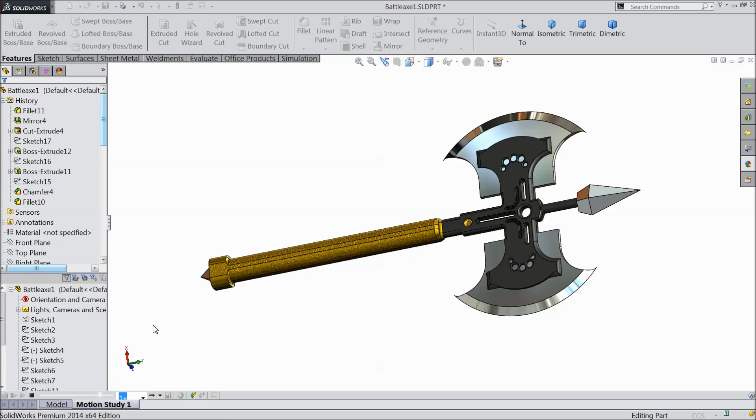Now let's start to make the Battleaxe. I prefer to choose front plane sketch. First select center line. Draw a horizontal and vertical center line. Exit.

Choose corner rectangle. Exit. This is the rectangle. Just select these three lines and make relation symmetric.

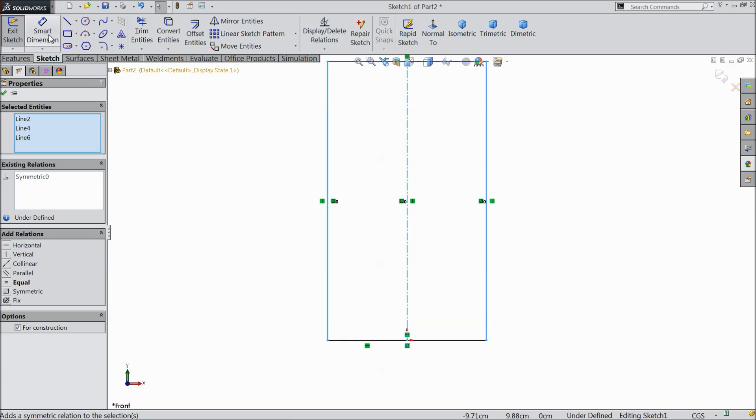Now select smart dimension. Select 5 centimeter. Make sure our units are in centimeter.

Select circle and draw a circle here. Let's keep the diameter 2.5 cm and the distance from origin point must be 15 cm.

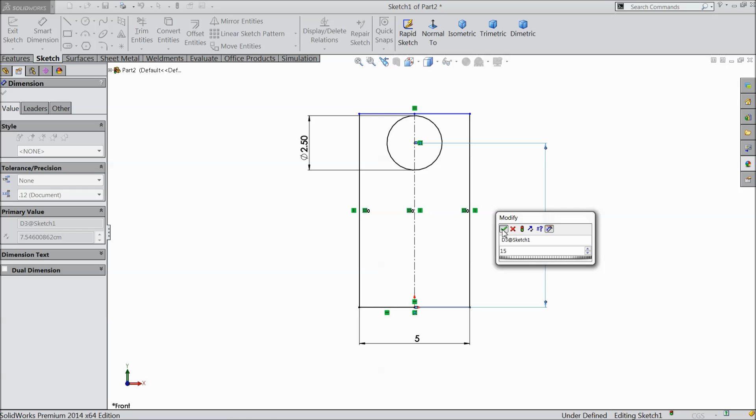Now expand this circle. Choose here center point arc. Start from this center point up to here. Exit. Now let's define this radius.

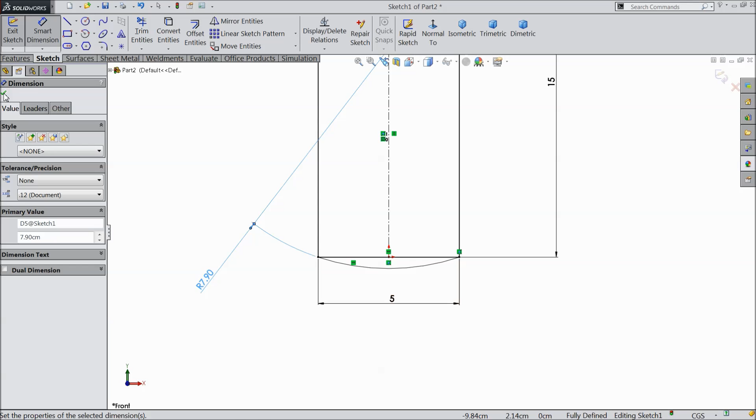Again choose center point arc. Select this point and start a circle from here to this point. Exit. Let's make the radius keep 7.9 cm. Now select this inside line and make construction line.

The same here, select this line, construction line. Choose corner rectangle. Draw a rectangle.

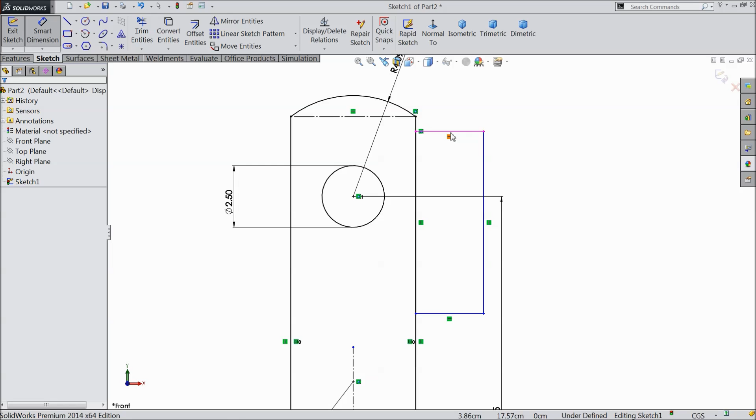Let's say width 3 cm and the distance from here to this line must be 1 cm. And let's define the length 7.5 cm.

Now select these three lines. Mirror. Mirror about this vertical midline.

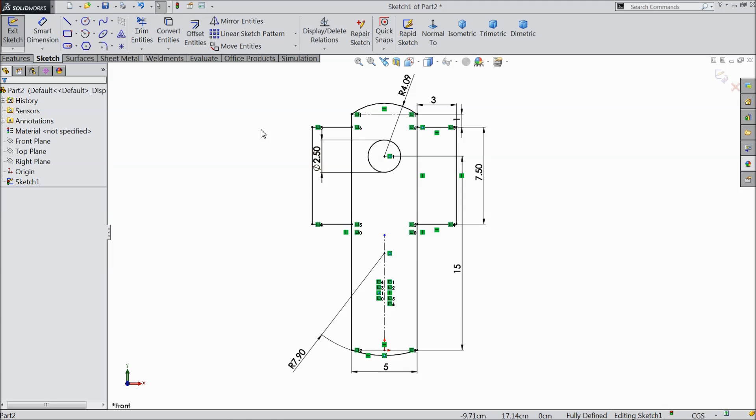Okay, now see, our geometry is fully defined. So just go to feature and select extruded boss.

Here choose this face and this face. And extrude up to 2 centimeter. Okay.

Now this is one of the parts of the Battleaxe. Choose fillet. Keep 0.5 cm. Select this inside face.

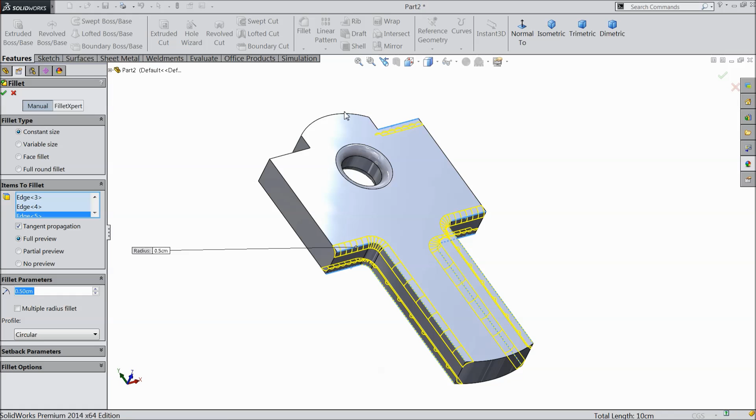Select this face. Okay, again keep fillet 0.5 cm. Select these edges. The same on opposite direction. Okay.

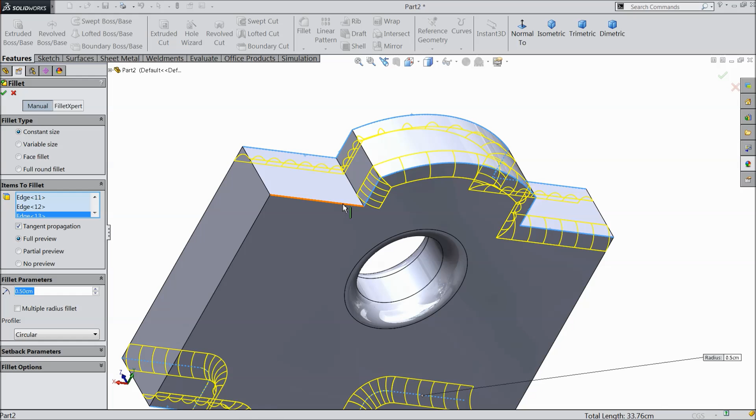Now you can see. Now select this face, sketch normal. First draw a vertical line from origin point. Exit. Choose circle and here draw a circle

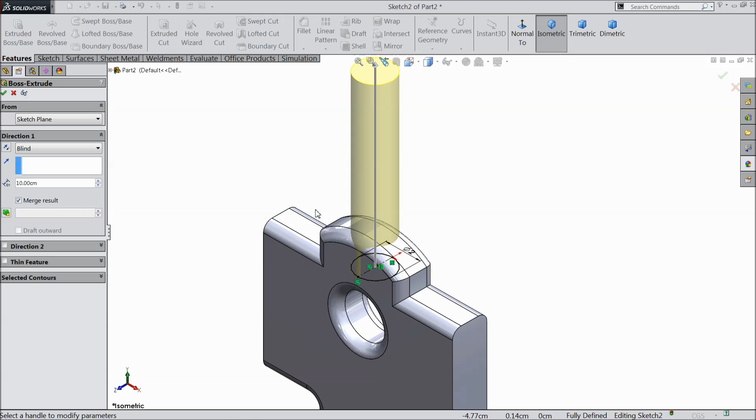and let's keep the diameter 2 cm. Okay, now simply extrude. Choose 3D view and extrude up to 10 centimeter long. Okay.

That's it. Keep fillet 0.5 centimeter and select this corner. Okay.

Now select this face, sketch, normal. Now here we will make the wings. Wings for Battleaxe. Choose line and start from this bottom line to this line.

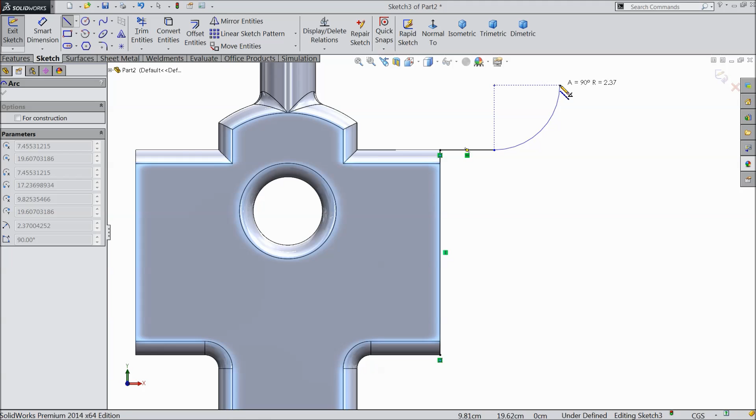Go here, come back, and convert it. Exit.

Choose center line and draw a midline from this. Exit. Choose center line, mirror, and select these lines and mirror about this midline.

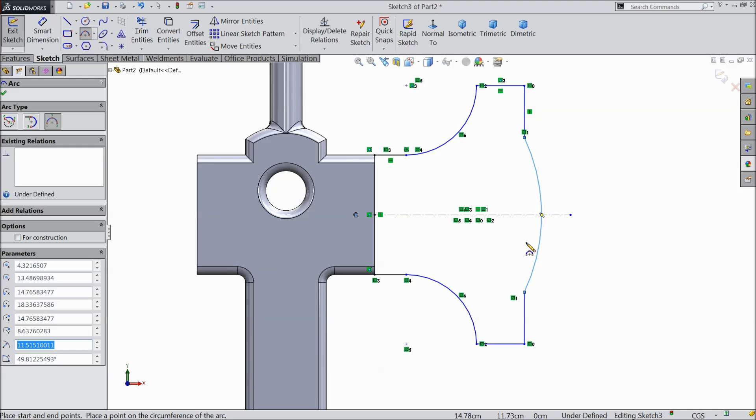Okay, now choose here 3-point arc. Exit. Now select this center point of this arc and select this point, merge.

Okay, now let's define. Keep 2 cm. Radius make 5 cm. Keep 3 cm. Make 4 cm.

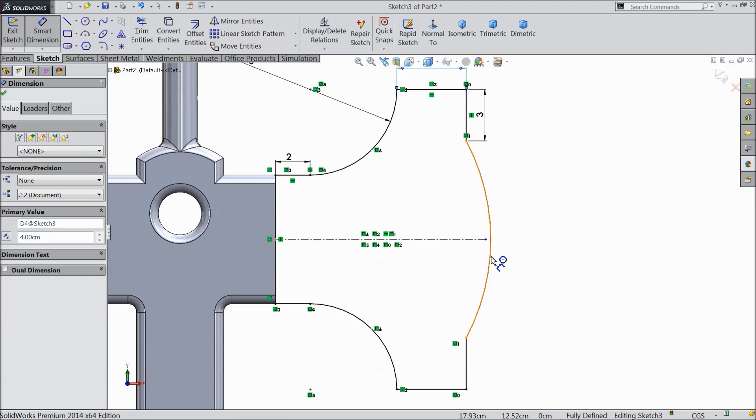Now the geometry is fully defined. It is by default 12.41.

Okay, now we want to mirror this full geometry to the opposite direction. So first draw a horizontal line, a vertical construction line. Make sure it is vertical.

Choose mirror. Now select here all the lines. Mirror about this line. Okay, now it is mirrored.

So let's extrude it. Select extruded boss. Reverse direction and 0.5 centimeter only. Okay.

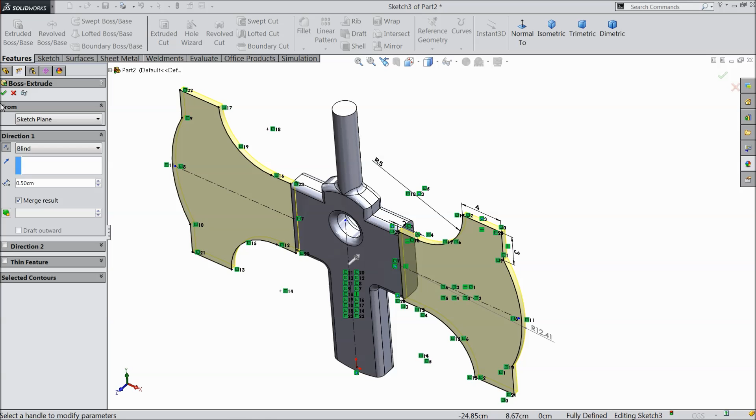Choose fillet. Keep 1 mm and select this edge. And here, bottom side only, 2 faces. Select OK.

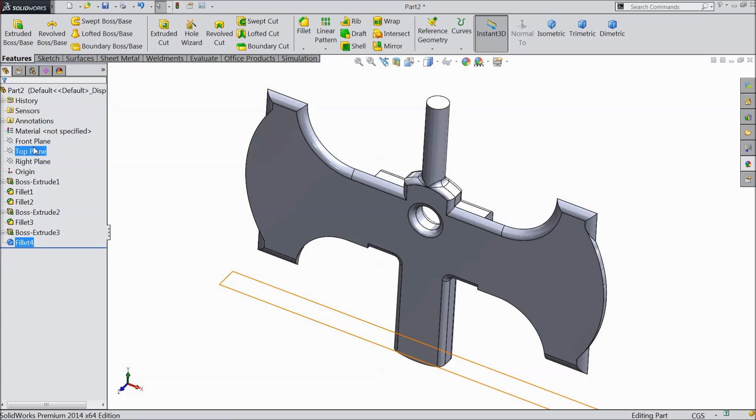Now we want to mirror this flange. So first we will create a plane. Choose top plane. Go to plane and create one plane. See, it's going to create a plane in the mid. Keep 1 centimeter. Okay.

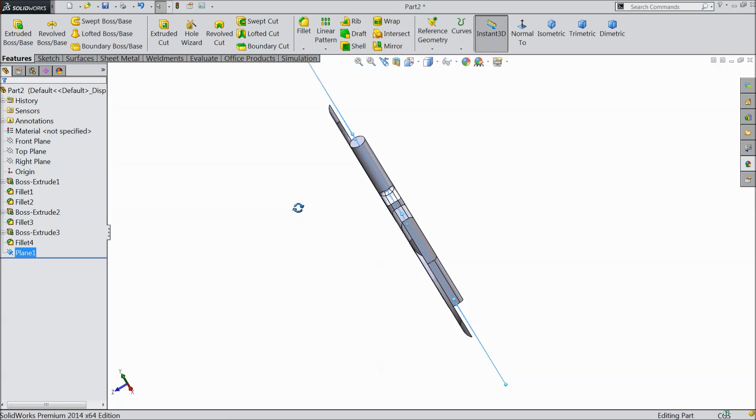Now the front plane, this plane already selected. Choose mirror and select extruded and fillet. Select OK.

Now see, hide this plane. See the 2 faces we created. You can see it here.

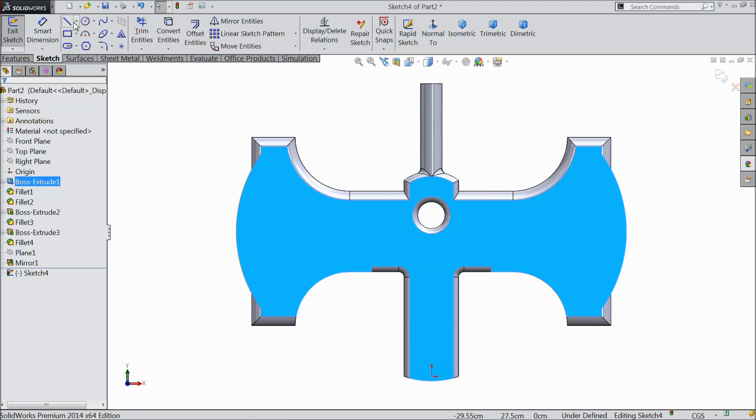Select this face, sketch normal, and we want to create some. First draw a line.

Cancel this, delete this line first, and draw a line just from this point to this point. Draw a line.

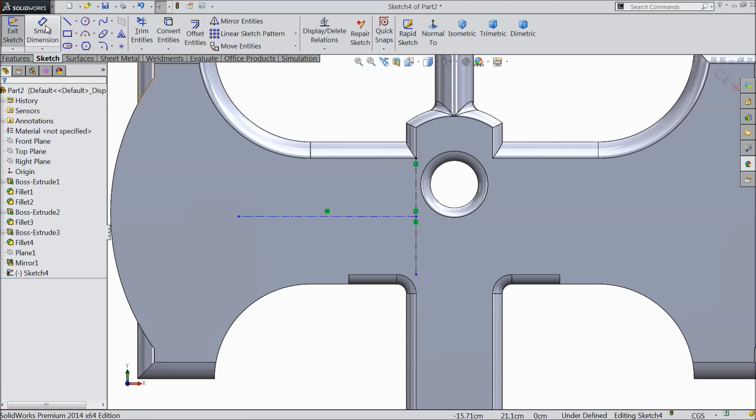Let's make this length 7.5 mm. Okay.

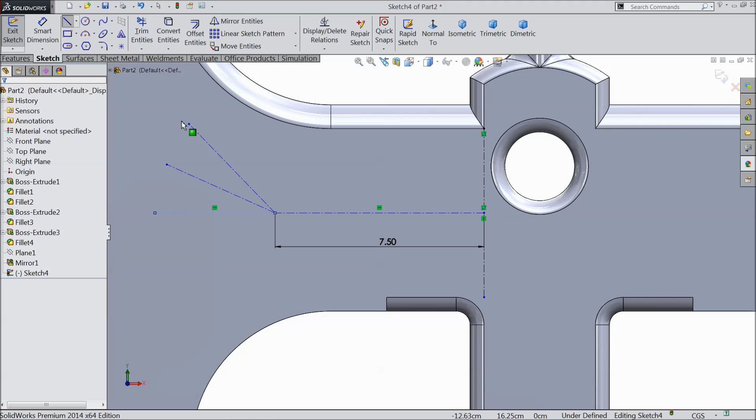Again choose a line, draw two lines, again expand this line, exit. Now we will define these lines.

First make angle 30 degree, 30 degree. Make the length outer 3 mm and this inside 3.5 mm. This also 3.5 mm.

Okay, now select mirror, select these two lines, mirror about this line. Okay, select circle and draw here 5 circles at the corner of these points.

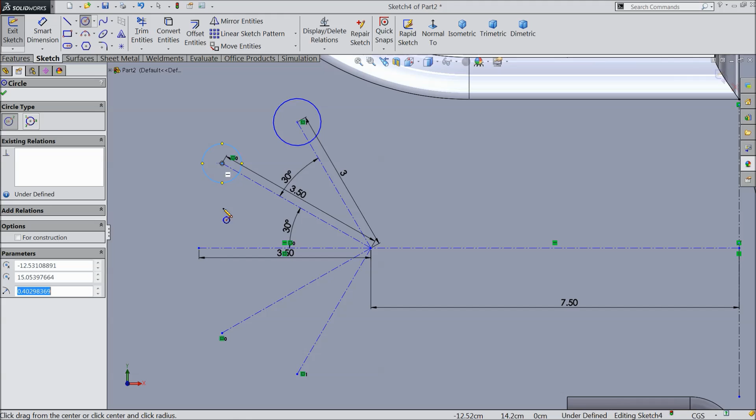Okay, let's define diameter 1 mm. These both are the same, and define this 1.5 mm. Now select these 3 circles, make relation equal.

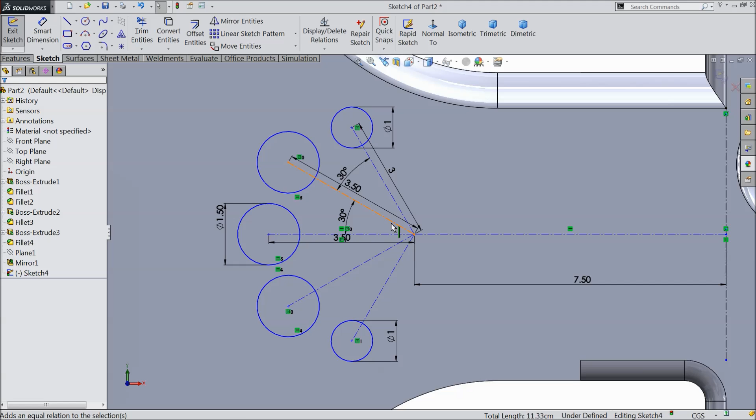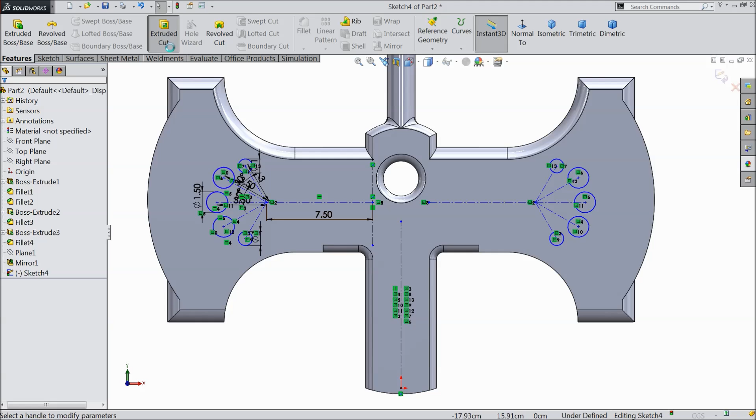Now select center line and draw a vertical center line. Now select this all geometry, mirror about the center line. Now we want to make a hole here, so select extruded cut, select through all.

See, okay. Now you can see the hole is created. Let's choose fillet, 0.25 mm. Here you have to select one by one.

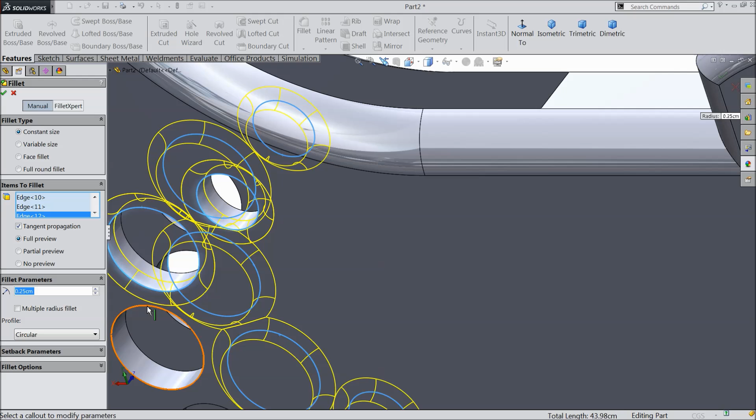The same as back side. Select here, OK. It may take time because of the more calculation. Now see, the holes are created.

Now here we will make the blade inside. So select this inside face, sketch normal. Choose a line and as usual start from here to this point, then up to 5 mm upward, then convert it and make a circle.

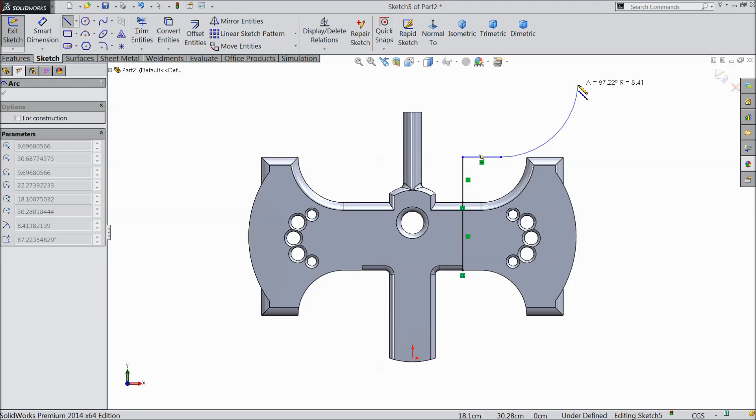Draw a vertical line. Define this length 1.5 mm. Choose center point arc and start from this line. Exit. Now let's define the length, circumference 1.31 mm. Okay.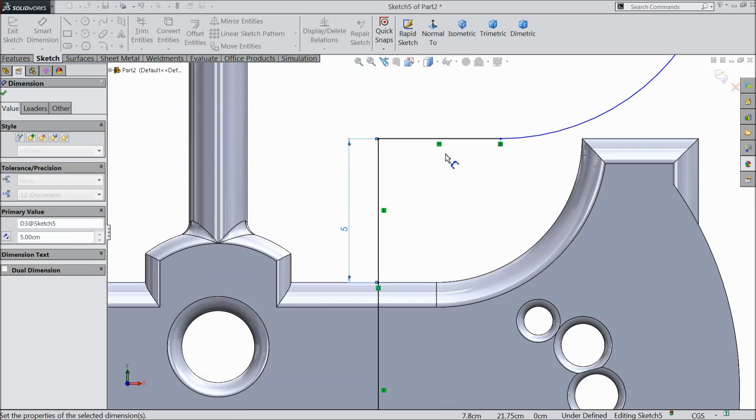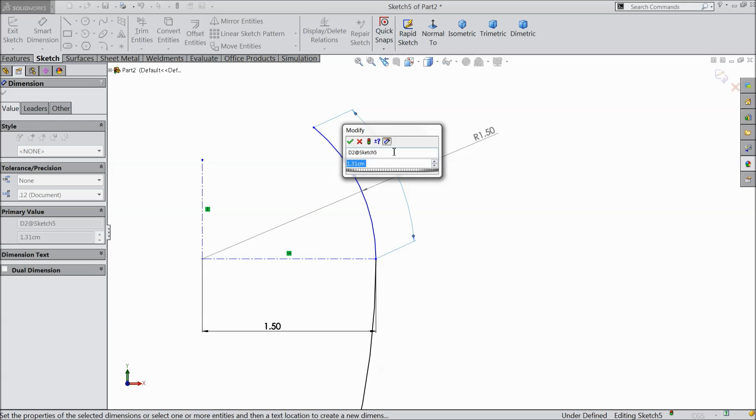5 cm, 4 cm, and keep this radius 7 cm. This also 1.5 cm. Or let's reduce this to 1.2 cm only. Okay.

Choose center line and draw one horizontal center line. Choose mirror entities and select all these lines, mirror about this center line. Okay, select here 3-point arc. Select this line to this line.

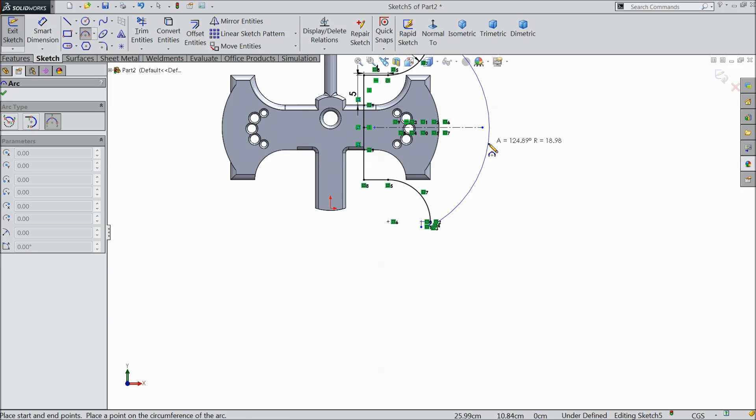Let's define the diameter, radius, 21.98 cm. This is the radius. Okay, choose here center line.

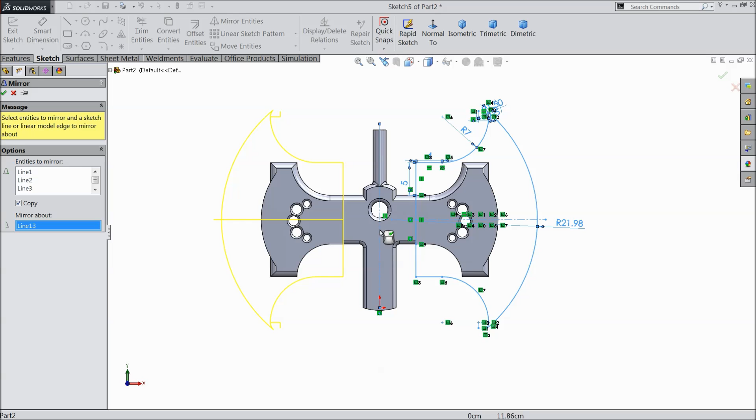Vertical center line. Now this all geometry we want to mirror it. So select this blade's full geometry, mirror about center line. Okay, see it's mirrored. Now select extruded boss. Keep how much? Make 1 inch, 1 centimeter.

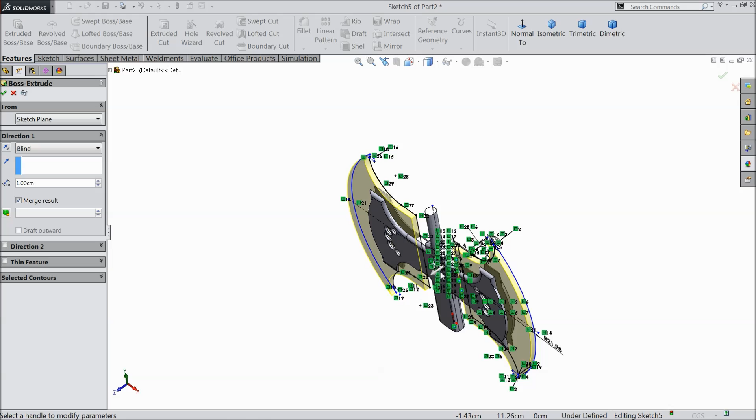Keep remember, we started from the end point of this. Okay. Now here we will change the color. Select this extruded boss, go to appearance, chrome, and we will prefer chrome plate. Now see the blades we selected.

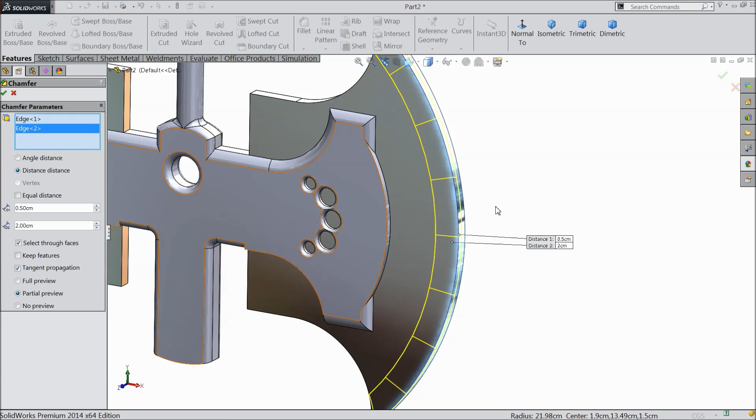Choose chamfer, distance 0.5 D1 and 2 centimeter. Select first this face and next face. Okay. Now see, it's become a sharp knife.

Again choose the same chamfer, distance 0.5 and 2 centimeter. Select here one edge of the blade and the second edge of the blade. Choose OK. Now see here, this is also a sharp knife edge.

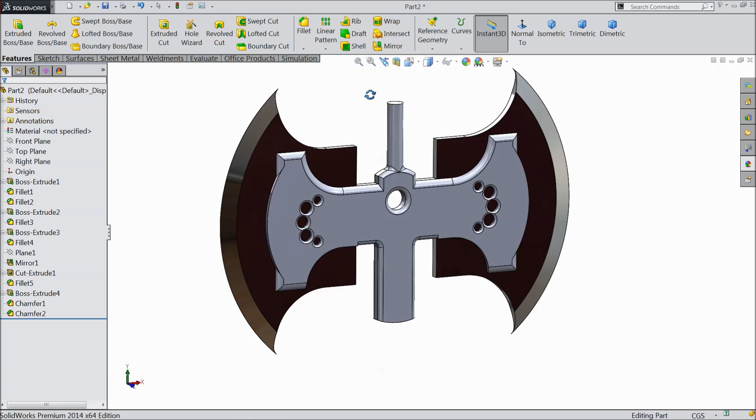Select both the chamfer and material chrome finish. And this body material we will prefer black iron. So choose from one end to this end. Go to appearance, find out here iron, and I prefer sandblasted iron. See, this is sandblasted iron.

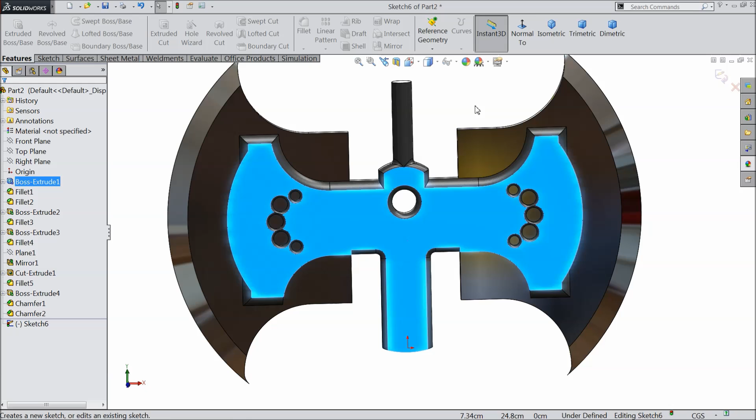Select this face, sketch normal. Select center line. Exit. Choose here center point straight slot.

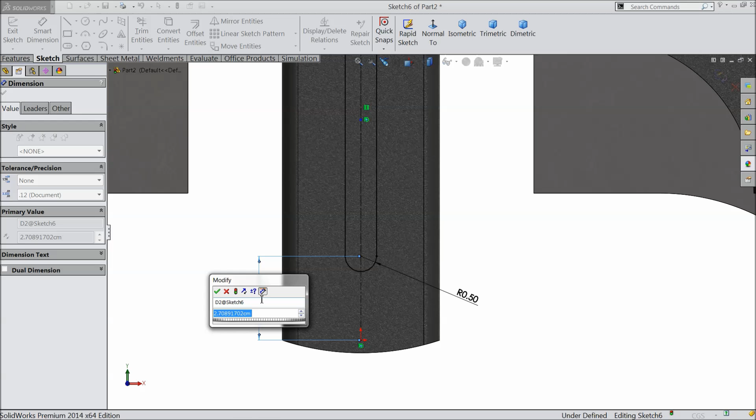Okay, now let's define this slot. Keep the radius 0.5 cm, and the distance from this end make 4 mm, and keep the length 8.2 mm.

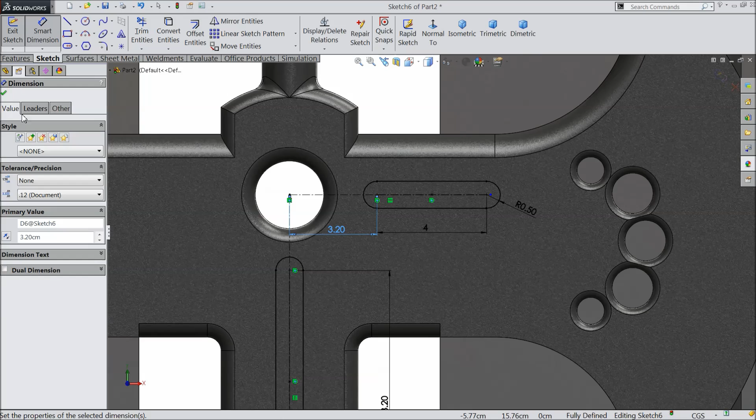Select this length 4 mm, radius 0.5 centimeter, sorry not mm, centimeter, and distance from this point let's say 3.2. Okay, now this oblong we want to mirror. Choose mirror, select this oblong and select this line. See, it's going to mirror here.

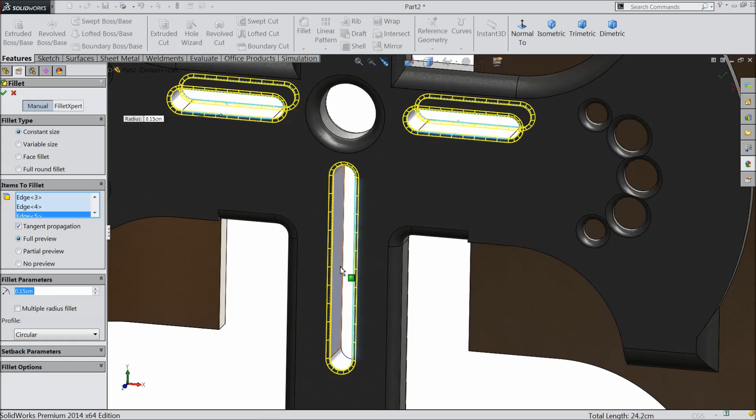Okay, now select in feature, go select extruded cut, keep here through all. Okay, choose fillet, select both sides edges, .15 centimeter. Okay.

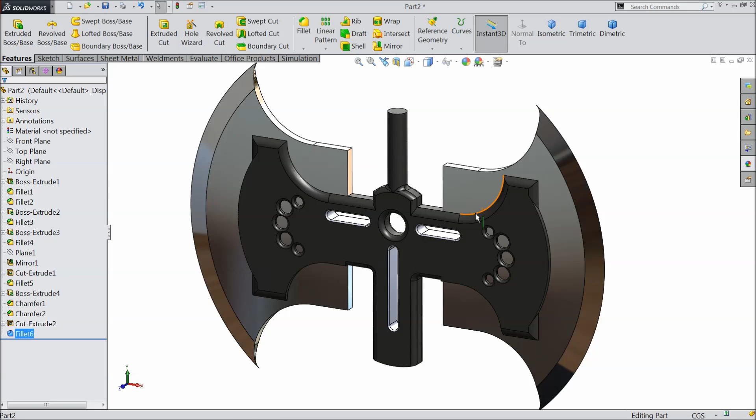So this is the blade, it's blade for Battleaxe. Now we want to make some cutout in this face, so select this face, sketch, draw a center line, choose a line here, exit, make sure this is horizontal and vertical.

Now let's define 1.7 cm, 3.25 cm, 1.3 cm vertical distance, and horizontal distance also keep 1.3 cm.

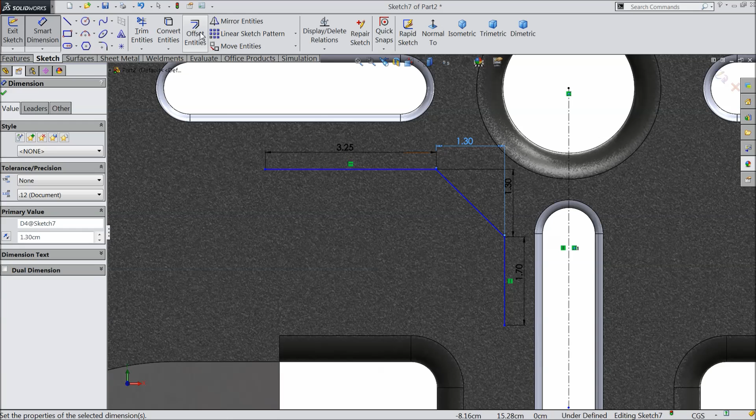Choose offset 0.5 mm, select this line, choose reverse. Okay, select 3-point arc, half circle, and the same here also, half circle, exit.

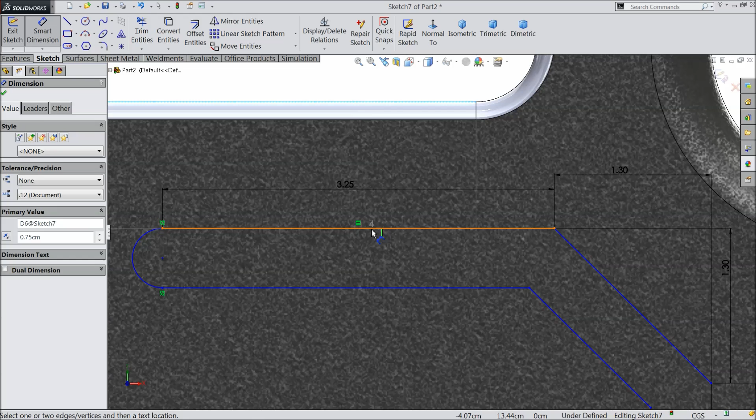Now let's define the gap from outer line, 0.75 cm. 0.75 cm. Now see, the geometry is fully defined. Choose mirror entity, select this all geometry, mirror about this vertical line. Okay, now go to feature and select extruded cut, cut depth 0.5 centimeter.

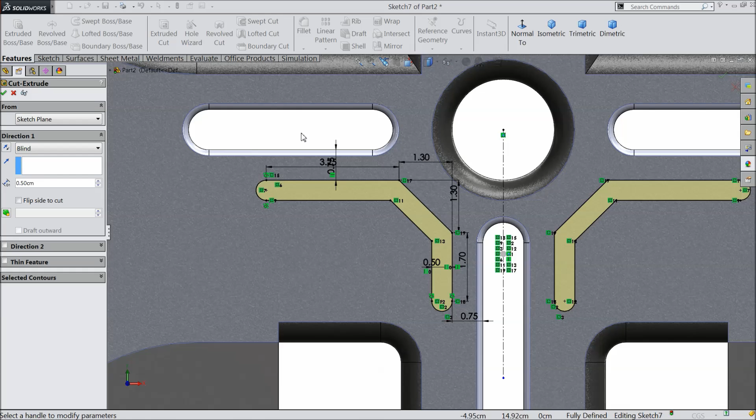Okay, choose fillet, keep radius 0.15 mm, select OK.

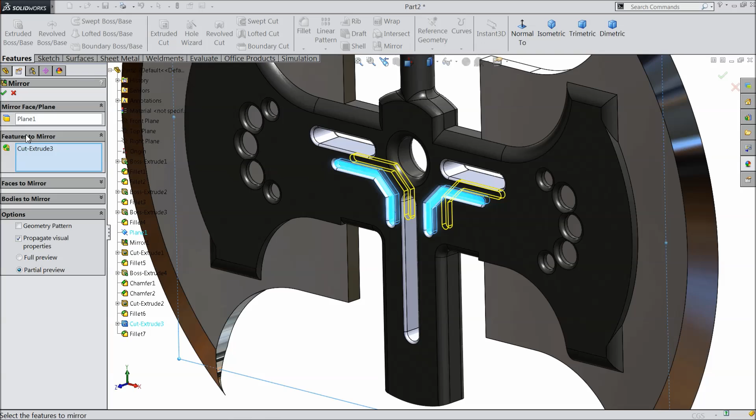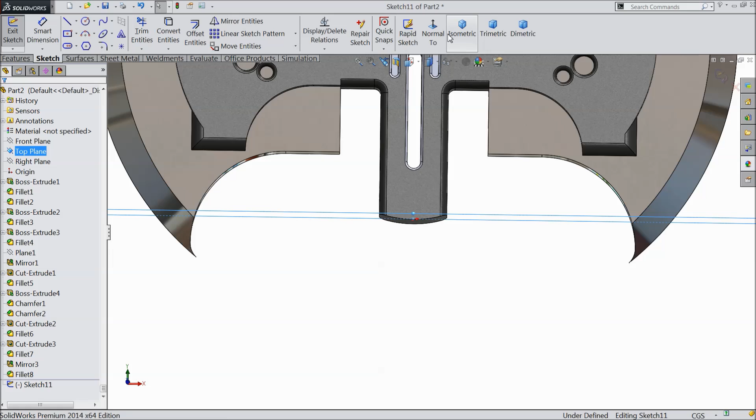Now we will make the handle. Let's start from the top plane, it is in bottom position. So choose top plane, sketch, normal. Select center line and draw one center line. Choose center rectangle, find out the midpoint and draw a rectangle.

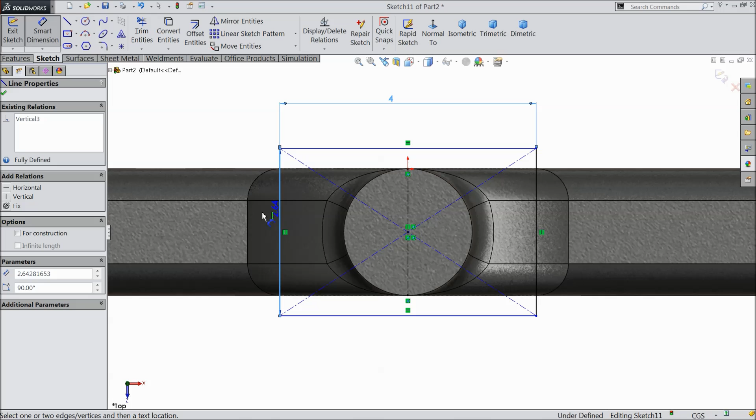Let's define the length: 4 mm, and the width or height 2 mm. Choose fillet, keep radius 0.75 mm and select the full rectangle, it will automatically select all corners.

Select OK, now select extruded boss. Select reverse direction, and extrude only up to 5 mm.

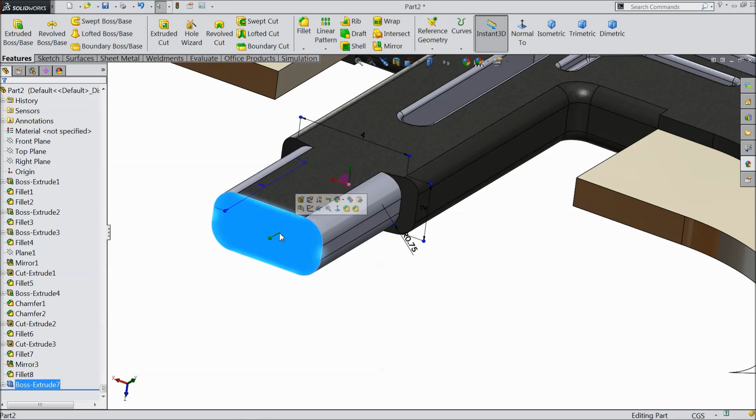Now select this face, sketch, normal. Choose center line and draw one vertical line. Again choose center rectangle, find out the midpoint and draw a rectangle. Let's define the length: 5 mm, height also 5 mm.

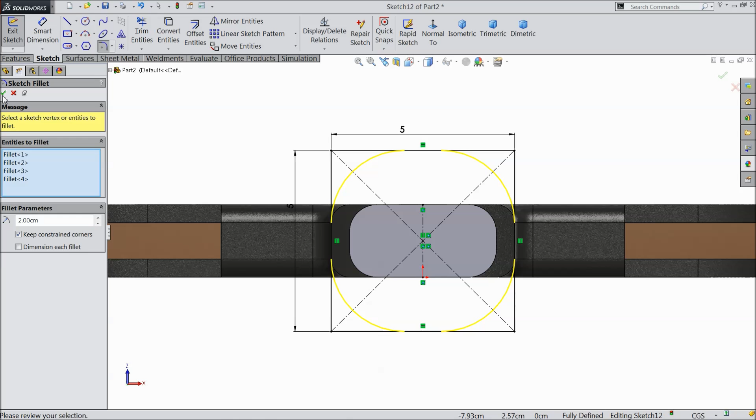Okay, 5 centimeter. Choose fillet, select the radius 2 mm. Select this full rectangle. Okay, now select extruded boss.

Now this is the handle, so extrude up to 50 centimeter. See, this is the main handle of the battleaxe.

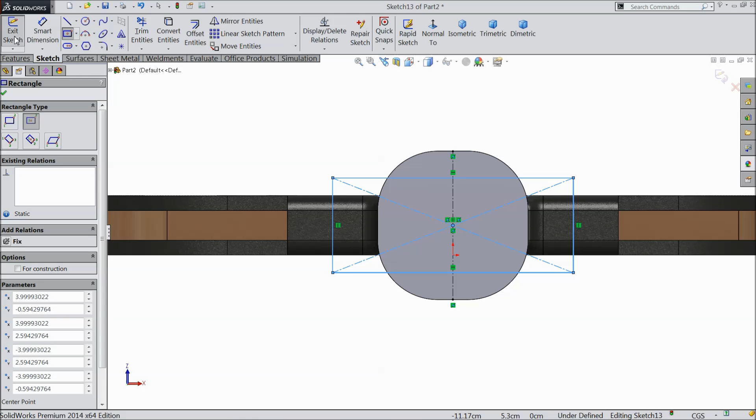Select this end face, sketch, normal. Here also draw a center line, construction line. Choose center rectangle, draw a rectangle. Keep length 7 mm and height 5 mm.

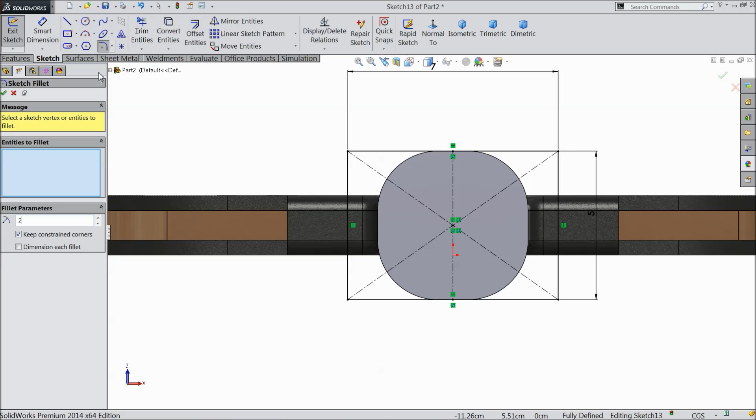Select fillet, keep 2 mm radius, select the rectangle. Okay, now select extruded boss, and extrude up to 4 centimeter, not more than that.

Now select this face, sketch, normal. Draw here a center rectangle, or better to draw a center line. Choose center rectangle, find out the mid plane, midpoint. Now define the length: one mm, and distance from outer line 2 mm. Now this is the size of our rectangle.

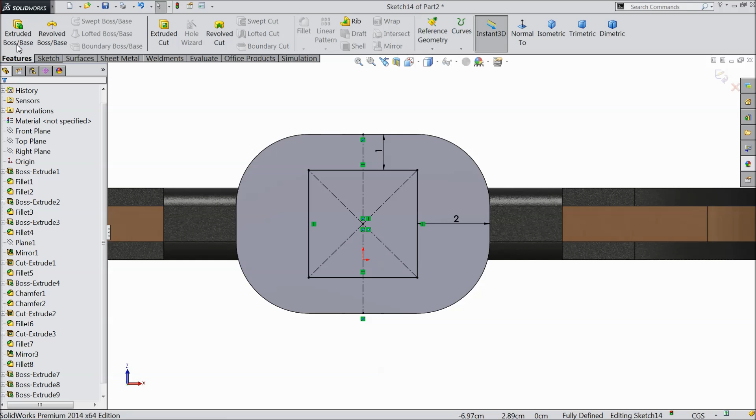Now extrude it, only 3 mm. That's it.

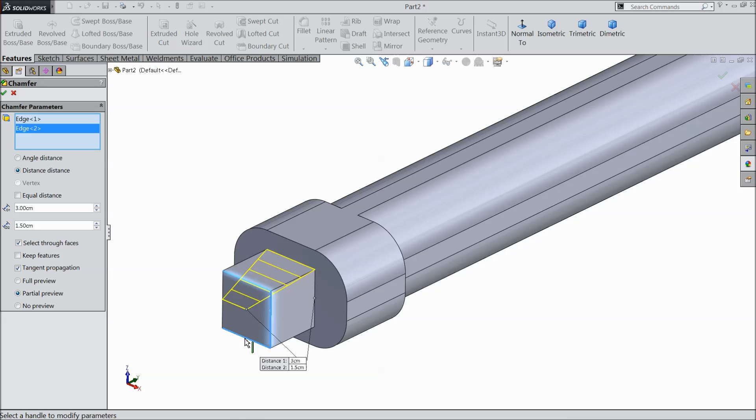Now go to feature command, choose chamfer here. Select distance, keep 3 centimeter and 1.5, and select these 4 edges.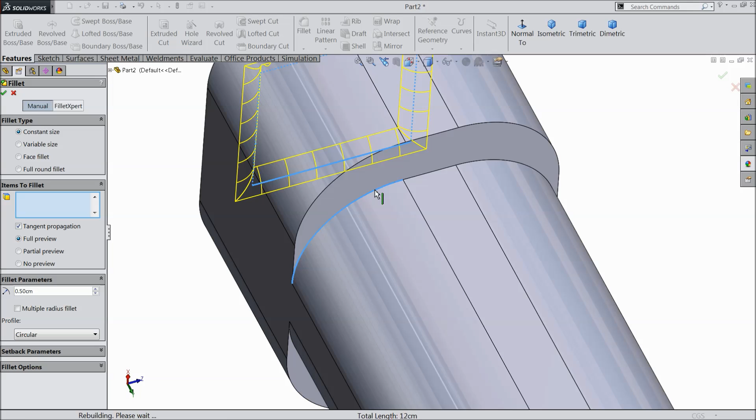Choose fillet, select all 4 corners here, and select two corners here also.

Now the next end, choose fillet, 0.5 and select this corner.

Choose chamfer, 3 cm, 0.5 cm, 60 degree, select this edge. Okay, now see the all edges converted.

Now select this face. Here we want to create a knife. Sketch, normal.

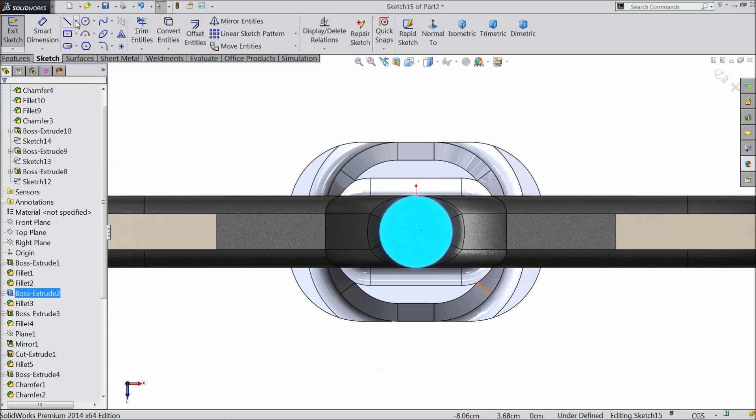Select line. Now let's define the length, keep 2.5 cm. And mirror these two lines about.

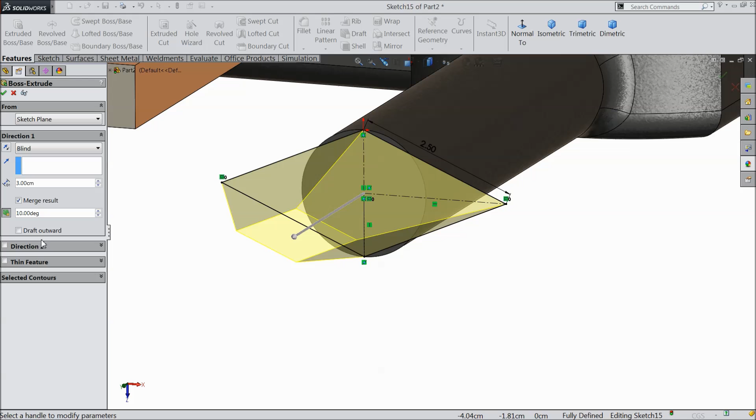Now let's try to extrude. Extruded boss. Extrude 3 cm and let's say 10 degree, draft outward.

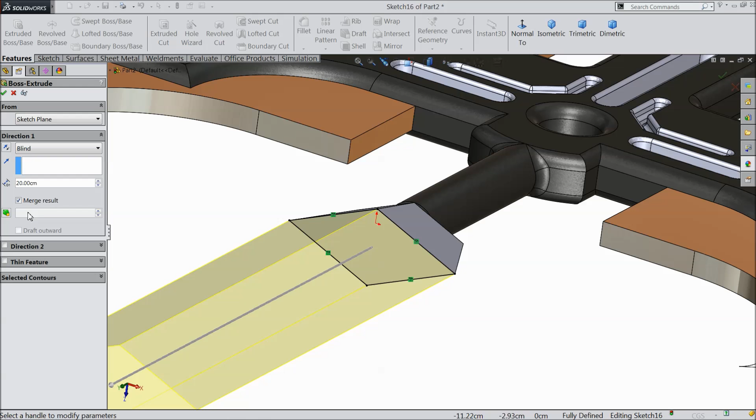Select this face, sketch, go to sketch and select convert entity. Now this face converted, simply select extruded boss. Select 20 cm and keep degree 7.

Now this is the knife edge created. Select both bodies, go to appearance, chrome plate. Now see, it's chrome plated.

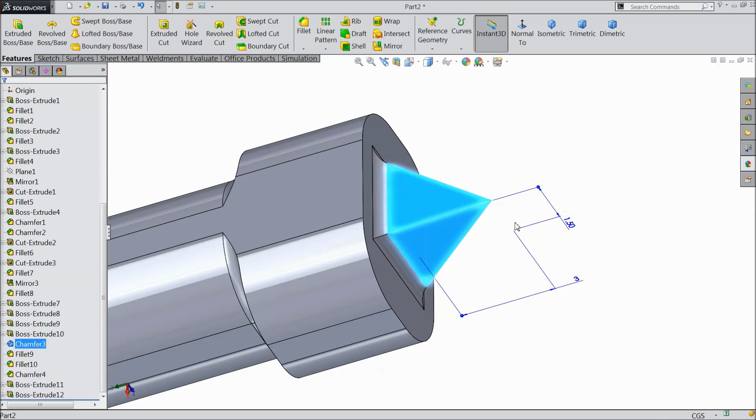Now select this knife. Select this face, chrome plate. Now here we will define some cutouts.

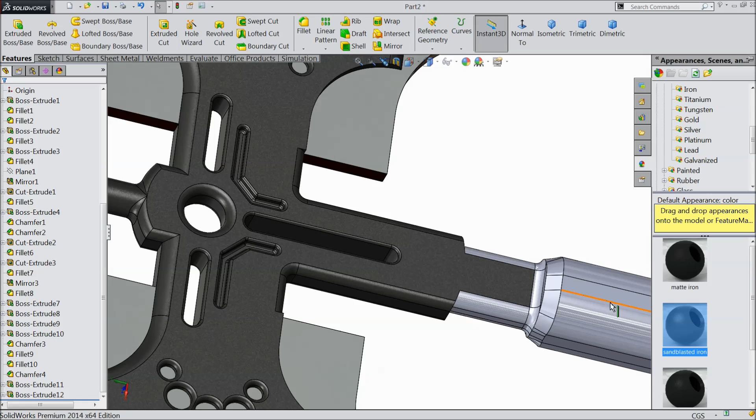Select all this, go to iron, sandblasted. Now see, this whole area is covered with the same material.

Now it's time to define the raw material for this rod. Select this rod and choose brass. I prefer cast brass.

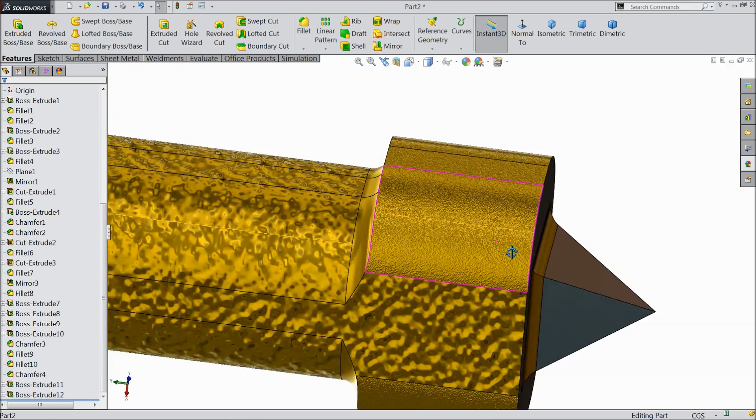That's it. Select this face and apply iron, sandblasted iron. See here, select this edge, brass, cast brass.

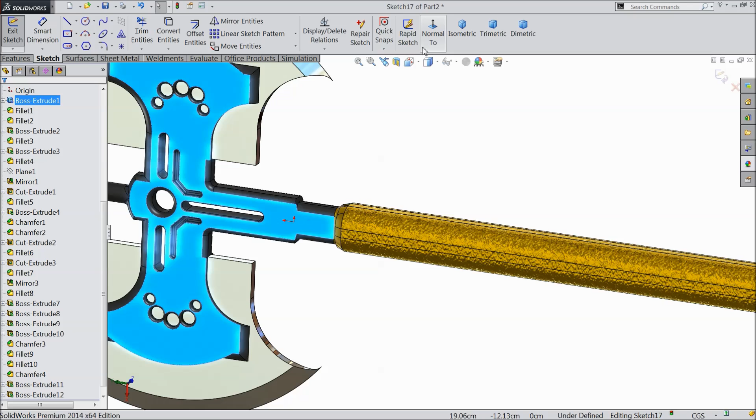Now select this face, sketch normal, and here we want to create a hole. Keep the diameter 2 cm and the distance from origin point 1.6 cm. Connect with origin point. Now the geometry is fully defined.

So select extruded cut and make the depth 0.5 cm, not more than that.

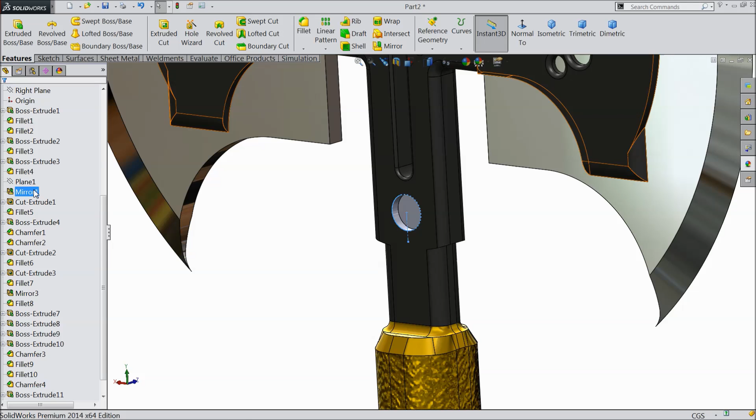Select the plane, we created one plane, plane 1, mirror about, select this cutout. See, it's going to mirror in the opposite direction. It's mirrored. Choose fillet, select inside edge, both directions.

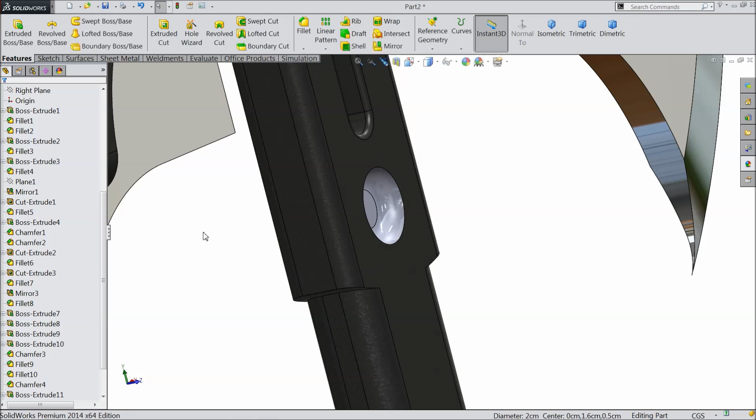Choose this fillet. Okay, so now this is our battleaxe.

It is chrome plated, and this is the blasted iron, sandblasted iron, and the handle is brass. See.

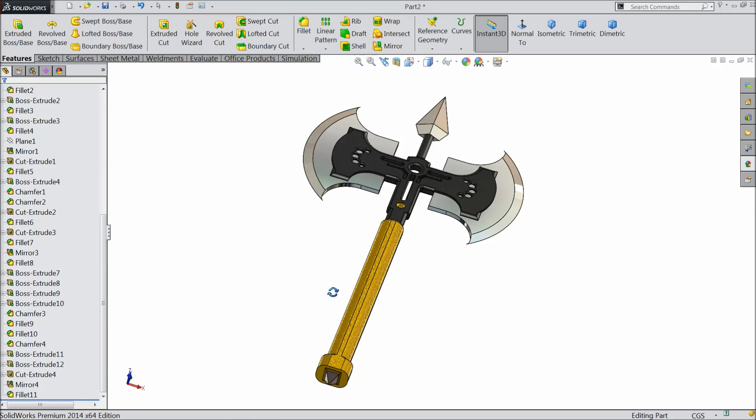Just save this part to desktop as Battleaxe. Battleaxe is already there, so I'll choose Battleaxe 1.